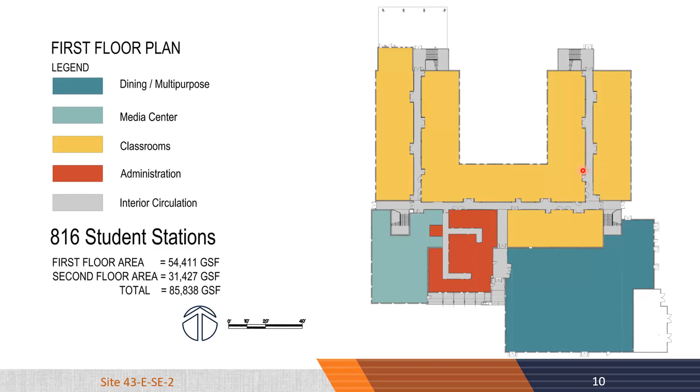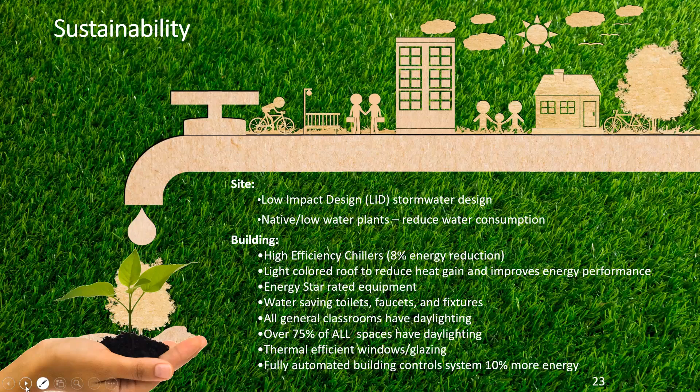Now I'd like to turn over the remaining part of the presentation to our construction team. This is Pirtle Construction, and they will go through some of the schedules and other construction-related issues. Good evening, everyone.

As Lauren mentioned, Pirtle Construction is bringing four team members here. My name is Richard Rodriguez, I'm the Vice President for the Central Florida office, and with me I have Jason Krasunas, who's a Senior Project Manager and has experience building this prototype previously, Jatin Amin, who is our Project Manager and will be on site every day, and Kenny Martinez, our Project Superintendent, who will also be working on site every day.

Jason? Yes, thank you, Richard. Good evening, ladies and gentlemen. As Richard mentioned, I'm the Senior Project Manager for this project, and I have experience working on this prototype with Rhodes and Brito previously on the Molly Ray Elementary School project. I just wanted to give you a brief history of Pirtle Construction, had you not heard of us previously.

Our first project was a little over 10 years ago here with Orange County Public Schools, with the Sessions Middle School and Elementary School projects collectively. Since then, over the past 10 years, we've completed 12 such projects here in Orange County Public Schools, and we're very excited to be working with Rhodes and Brito and Orange County Public Schools again.

On the Site 43 Elementary School project, we want to ensure everyone in the neighboring communities of Village Walk and Waters Mark apartment homes, as Chris mentioned earlier, understands the sensitivity of how close those communities are. We're not just focused on construction, but on making sure we maintain a good neighbor policy throughout, so that at the end of the job you remember how good Pirtle Construction was working alongside the district in creating a great environment and school for the Lake Nona area.

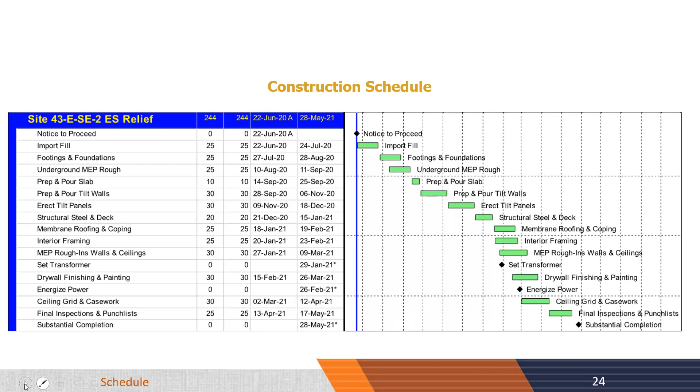Basically, what we have is a large site that's going to need a lot of import — about 114,000 cubic yards of dirt brought in onto the site. Those of you who live in the area and have been by the site recently have seen we've already started our import and clearing operation.

So we're going to have about 5,200 trucks roughly coming in and out, and obviously safety is a key focus for us in keeping a good relationship with the community, as Jason mentioned. We want to make sure we're doing our part to keep the roadways clear and clean, whether that means bringing in the local Orlando Police Department to help with safety measures and keeping trucks from speeding. We're going to do our part to make sure that happens.

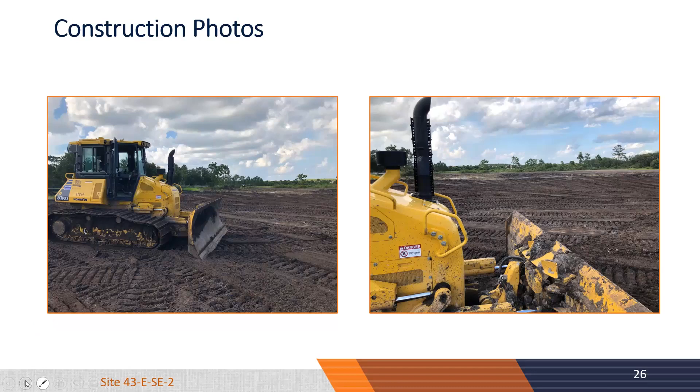Also keeping the streets clean — we'll have stabilized areas at our construction entrance so we can reduce the amount of dirt tracked back out onto the roadways. We're also going to have street sweepers on a daily basis and utilize other measures to make sure we keep the neighborhood clean as well as safe.

So over the next couple months, you're going to see a lot of import to bring the building pad and the site up to grade. Then we'll have a lot of concrete work going on, so you'll hear a bunch of noise but may not see much activity until we start to stand the building. In about three months, you'll see a building pop up out of the ground.

Then, like Jatin mentioned, we'll be putting the roof on and getting into the inside of the building to continue our finishes. In late spring, we'll have a project pretty close to complete and will start doing our punch work, getting ready to turn it over to OCPS.

There's a question, how do you plan on diverting traffic off of Lake Nona Boulevard for the school car line? The answer is the improvements for the school include the cars entering Lake Nona Gateway Road, which connects to Gateway Loop. The loop will be modified to be one-way counterclockwise. A new left turn lane will be constructed on Lake Nona Boulevard. Chris, do you mind bringing up the site plan so that we can see what that's referring to, and maybe you could point out that turn lane and that pattern.

So I'll read that again, that cars are going to enter Lake Nona Gateway Road, which connects to Gateway Loop. I think that's a little to your right where that first arrow goes in. The cursor is being a little jumpy on us, but if you see that little arrow right near where the laser pointer is, that's the entry point, and you can see the racetrack going from there. That's where cars are going to stack up for both pickup and drop off. The idea is to keep as many of them off the road as possible. And then the loop is going to be modified to be one way. The left turn lane should also help alleviate some of the traffic from the school.

We were asked for a physical address for the school, and let me see if I've got it. Oh, I just got it. It's 12253 Lake Nona Gateway Road in Orlando.

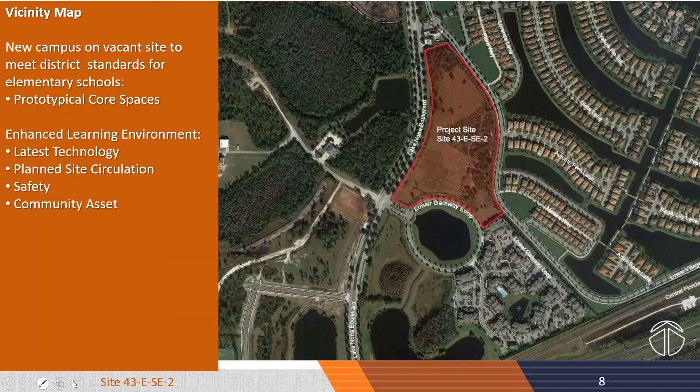Who's the landscape architect? Bonnet Design Group from Maitland.

Now there's a question, will there be a 15 to 20 mile per hour school zone on Lake Nona Boulevard? I can't speak to that. I know we have some folks from the city, or if there's someone on our team who's worked on that, if you could unmute yourself. I don't know if Mo might know, or...

Hey Lauren, this is Jay. Hey Jay. So as of right now, what we'll be doing out there on Lake Nona Boulevard, there will be the typical school zone signage, but there's not any specific reduction in speed that's been identified so far. We are still in the review process with the city, so that may be something that comes forward, but as of right now it's just going to be a typical speed school zone. And I would add that sometimes you'll find that zones that aren't designated when a school opens might be added later. We've definitely had that where there wasn't traffic before the school was built, but as soon as it opened, it became justified. So that's something we'd be watching out for too.

Question: with the current coronavirus pandemic, has the issue of installing additional sanitation stations been considered and planned for? Interesting question, I figured somebody would ask that. What I can tell you is that even though this school isn't opening till 2021, and we don't know what the situation is going to look like then, we have looked at making some changes to our design guidelines, which govern how we build every school that we build. We've started to put plexiglass in all of the front office areas so that the front office staff have a shield. We've also started looking at some changes that can be made, particularly in the bathrooms area, because bathrooms are very high touch.